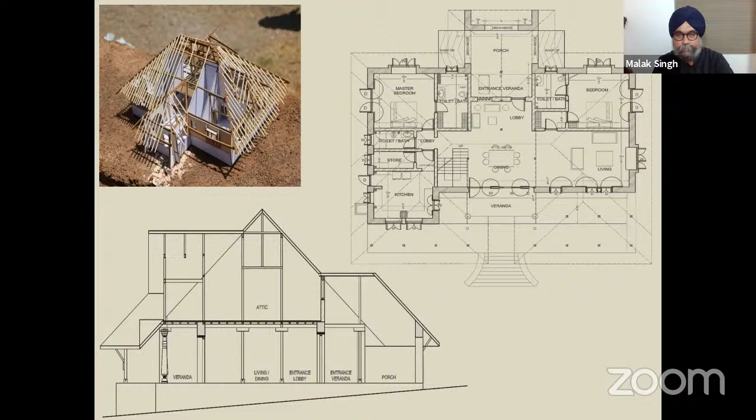That's the house from the other side. You saw the entrance before from the west. That's how it looks from the east. The site is a bit sloping. That's how it looks from the inside. You can see the timber first floor, attic above, terracotta tiles. This house remains extremely cool even during summers. That's a lime plaster on the walls.

I must mention that we really like to work with the clients very closely. Clients participate in the entire process and work with us in choosing small parts of the building, furniture, finishes. So we believe it's a partnership, because I think buildings are over designed these days. And I think the house finally needs to look like the person's house rather than the architect's design.

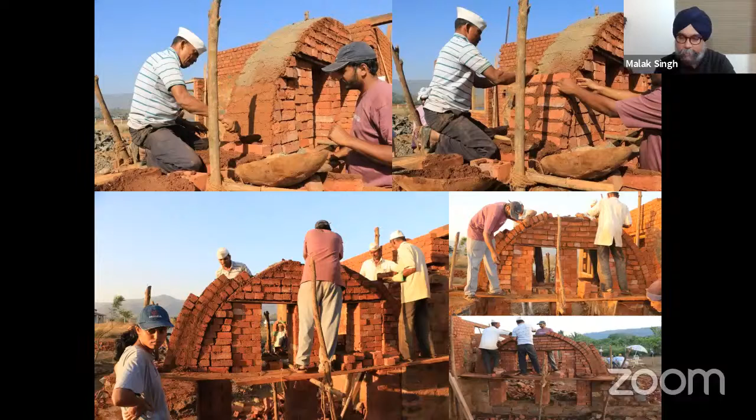That's the veranda, which is really the most interactive part of the house. That's what you can see from the veranda on the ground floor. That's the process of making. There you can see the arches being built. You can see the building behind in the background, where the walls are all in mud mortar. You can see the arches being done in mud. My architects are working along with the masons. And then this is how the arches look.

That's how the first floor looks, with the wooden floor and the clay tiles. Extremely comfortable in summer. And that's how the building opens up to the view on the east, on the first floor. After doing that building, the client decided, because it was a very successful venture and they were really doing well at business. So that was a 5,000 square feet house with almost just three bedrooms, because it was a homestay.

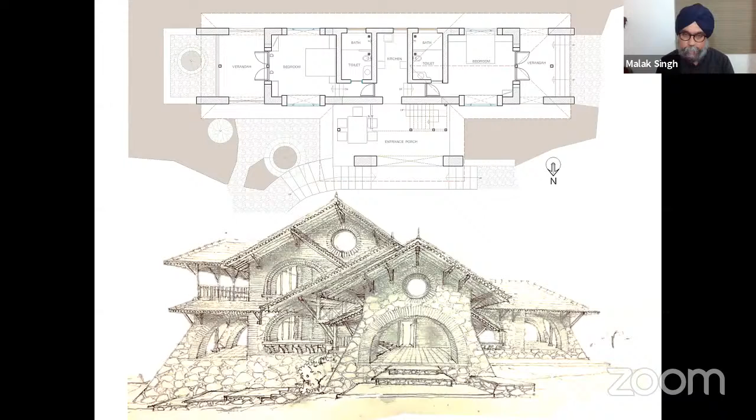Then the client commissioned another building right next to it. You saw that this house had a view to the river. So because she needed more rooms, she commissioned a house right in the same plot, but perpendicular to this building, so that we can avoid cutting the view of the first project. So you see a very linear plan, a series of rooms, and therefore we thought that if it's just a linear thing, we could use a language of arches because it's a unidirectional kind of building. So that's how the building turned out.

This was on the opening day. And you can see the old building to the right. This is perpendicular to that. It's actually the side open space which was there. And that's how both the buildings look together. You can see the big building behind, the one I showed you before. While there is a continuation in the materiality, the language of the construction is different. Materials are the same, and it's done by the local people.

So we are also learning techniques, passing on some innovations. But at the end of the day, the people have a feeling that, wow, this is beautiful. And the question they have in their mind is not how the hell did they make this, but the feeling is that, wow, we can also make it, because it's their own cousins and kin who have built this building.

So that is also a hidden agenda I have: sure enough, I'm building for this client, but I'm also speaking to the local population, and I'm showing them that this is some architecture to look up to, not just the kind of buildings that you look at from the cities, or the people who go back to their villages and build unnecessarily using concrete and steel. These are also buildings which can be built, and it was quite successful. A lot of people are wanting to get similar buildings done from us, right from the millionaire to the farmer.

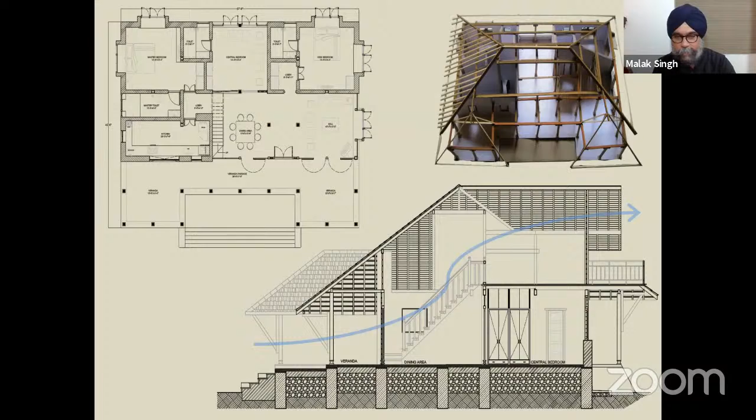This is another in the same series of similar projects, but this is a house. This is a kind of weekend home, not a homestay. I'll just run through this quickly because it's the similar typology. Buildings without cement and steel, except for, of course, the tiling, etc. Veranda is a common feature, local wood, local craftspersons.

Another feature you will see in the buildings I'm doing is, since we are in a warm and humid climate, a lot of the buildings don't have walls in the living, dining, and common areas. The walls are only in the bedrooms and kitchens sometimes, so basically there's a question of privacy, etc. But otherwise, a lot of these common and public spaces are all open. They don't have walls. They have just kind of fenestration and glass partitions.

There's a staircase which we detailed out. Interestingly, this staircase was detailed with the waste wood which we got from the roof. So each member of the staircase is actually a part of a roof. One is a common rafter, one is a batten, one is the planks we used in the ceiling as a boarding. This is a typical bedroom where it's just lime plastered and extremely cool. An attic.

Another house in the same series where it's a ground plus one structure. But here we used a couple of things. These are all, of course, needless to say, all in mud mortar. Some details which we used for construction. You can see on the top right, we've used a double tile. There's a bottom tile and another tile on top.

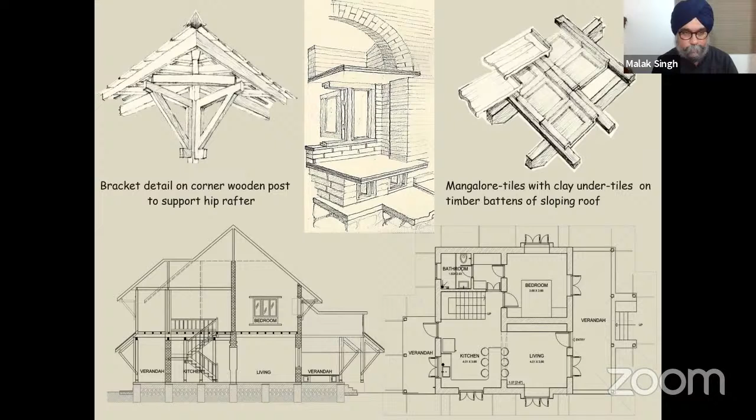That makes this house one of the coolest houses we have done till date, because of a double clay tile roof. That creates an air gap and makes the building cool, apart from the other factors of design planning. There's a double arch we have done, and you can see the double height. Those are the tiles we are talking about, and of course, there are these openings for letting the hot air get out and getting some light to get in.

Now, there is a kind of house which I have done where it's extremely linked to the ground and the resources are from. So you see these wooden columns and posts. This is a community house. These wooden columns and posts are basically those trees which you see in the backdrop. Just maybe a couple of months before this house was built, all these wooden members were those trees. This community has been protecting the forest for more than 2 decades.

So when I was to design a community house for this organization, we just had to learn from what the local typology was. We encouraged the organization to adapt local building techniques and planning systems. Of course, there were people from all over who had come to learn what we were doing, and they participated. So it was a collaborative process. The community is called Vanwadi, and they have visitors from all over the world. So basically, that was the model.

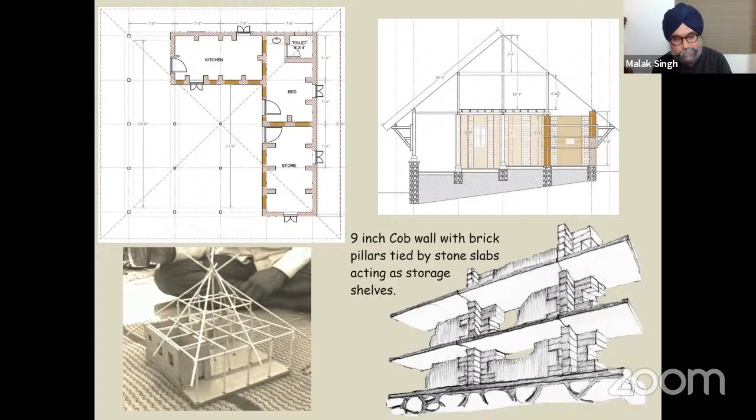So that's the roof. We learned a lot of indigenous techniques from them. They use an alcohol which they brew from the mahua flowers, which they use to paint this wood. That treats it. It's pretty good for many years.

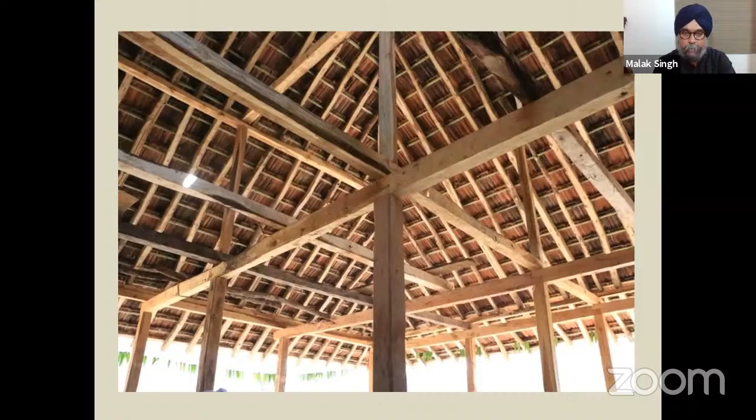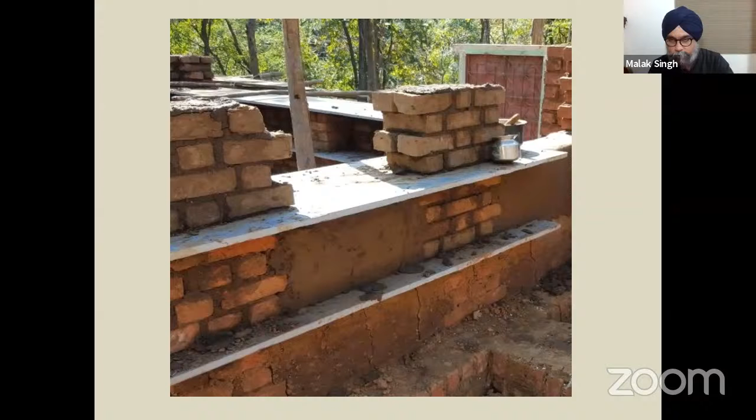This is how we did the walls. You see that there are these brick pillars, and then there is a mud wall in between. The stone shelves come in as stiffeners. We put them in while the construction is going on, but later on they end up as a store, helping as storing shelves. So they give stiffness to the wall, and this is how the wall was being built, the cob part in the center between the brick piers.

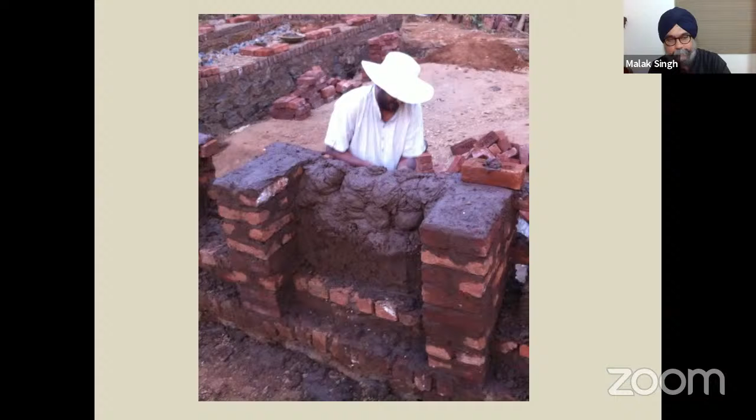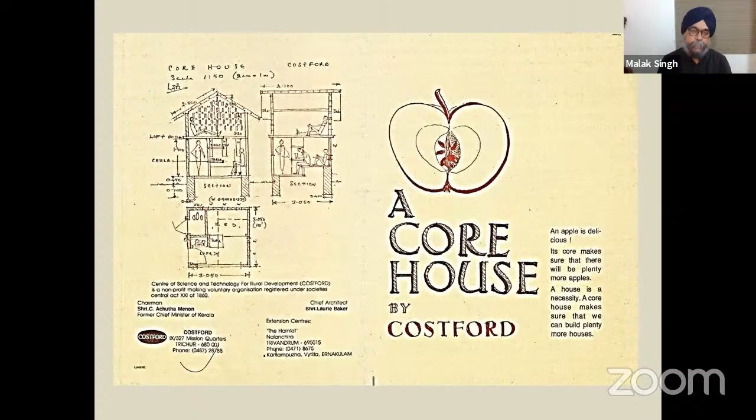Bakerji shared a concept of a core house. In furthering the understanding of a village house, this was very important because if you see these sketches, a central portion of the house is built as a core, just like an apple, which he has drawn up here. Around the apple, there are layers which grow. The rooms, the central core, is supposed to allow these spaces to grow around itself. So when you design the first block, it can allow surrounding blocks to grow. This is like thinking of the future, thinking of expansion, saving future costs. It's always been there in the village thinking.

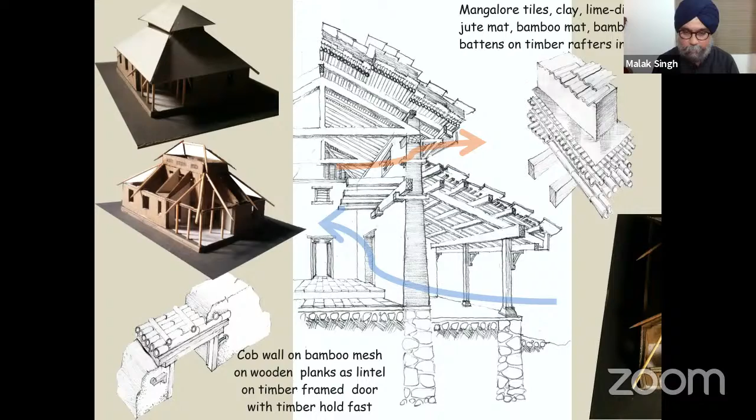This is how the house was done. It's a village house without any pretense, without trying to look like a showpiece, reflection of people's aspirations. This is how it was made.

It is interesting how an architect can actually be a catalyst to go and revive a local technique when the locals themselves are unable to do it. It's pretty humbling as an experience. This is the mud wall being built, 3 feet at the base and 16 feet tall. As it goes up, it becomes 1.5 feet at the top.

A bamboo boarding roof with country clay tiles on top of it, and extremely cool. You can just see the quality of light which comes in and how cool it is. I mean, if pictures could tell. Some details - you can see the mud wall, you see the details for the brackets.

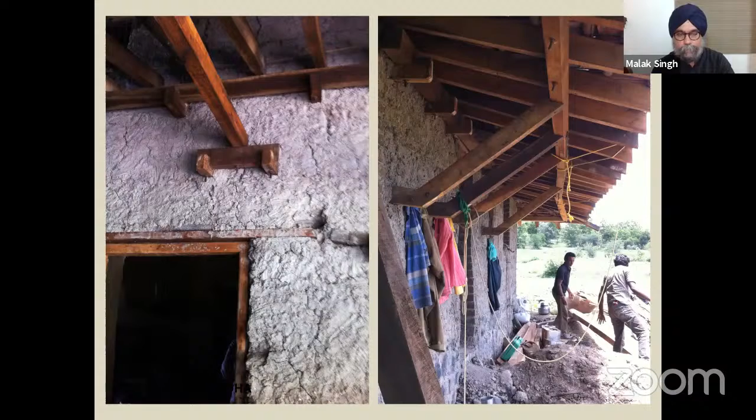Now, part of my understanding of this talk is about nature. Part of my understanding comes from a theory of cultural ecology, where Julian Steward really proposed that the cultural core is there - some aspects of culture are taken at a very superficial level, and there are some parts which are actually at the core of it. So when we talk about nature, I have come to understand that you cannot look at nature without understanding how man has looked at nature over the millennia. And culture is that kind of sieve or filter through which man has looked at nature.

And like it or not, our choices are mostly socio-political. What I mean is that I cannot design a house in a local area without going and making friends with the masons, without going and chatting with them over chai, without coming across as harmless to them. In fact, without showing incentive that they can learn a lot, earn a lot from my intervention. So there's a very socio-cultural aspect to my practice. Without that, I don't think I would have been able to conserve nature, because I have to get on the same plane as people in the way they look at nature, and then we can together do it through our buildings.

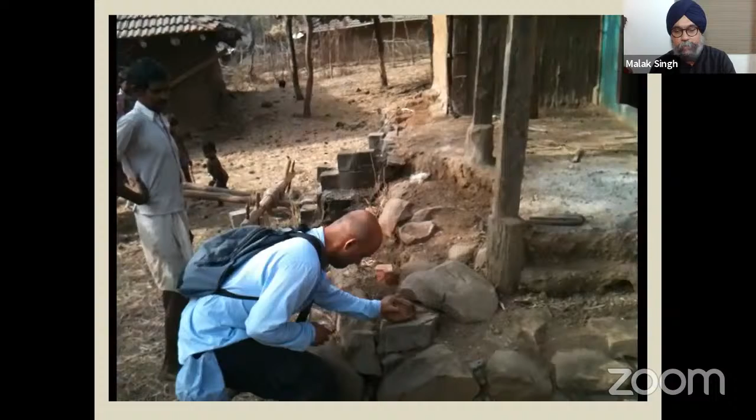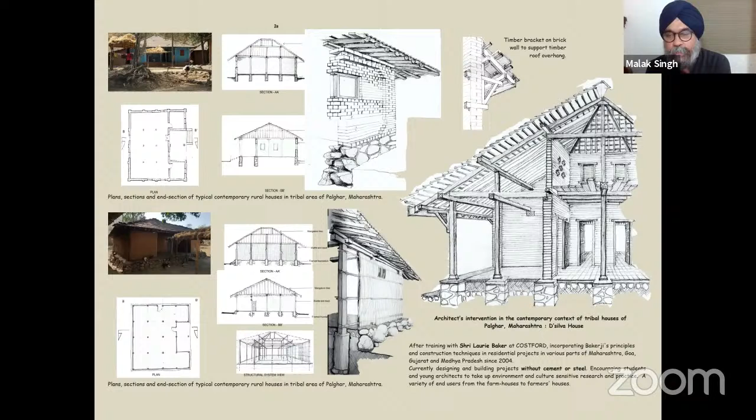This is the study we did for understanding the technology. This is a study we do for most of our projects where we don't know what are the types of constructions. To the right is our solution. It's a composite building with the same plan, same construction grid, but we tweaked it for our advantage. Here you can see the plan and the model of that building.

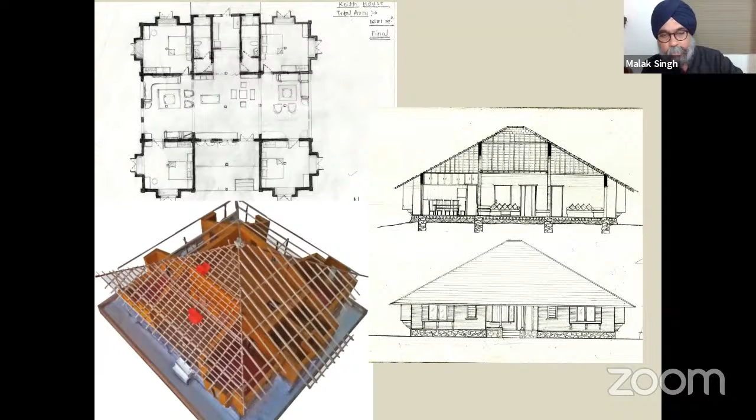We have been doing a lot of hand drawings, as far as we can manage, where we don't use computer drawings because they're no use for the contractors anyway. We like to keep working a lot with our hands.

Central core building - remember the core building I told you about? The central space is a core, and surrounding all four sides are verandas, as you can see here. See the cross section - you're seeing it from a veranda.

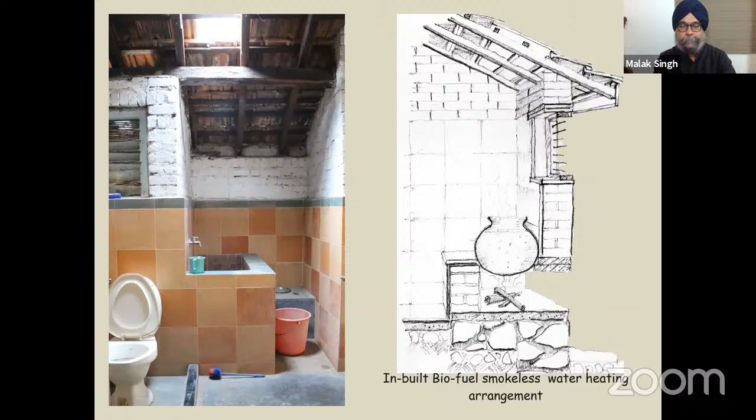So the idea is that one has always been thinking that trying to make a house is not just making a house for the owner, but it is in a way trying to give back to the community around, to try and see if some improvement is possible, affecting a much larger landscape than just the building and the owner you're building for.

So they said that, well, these guys, all they need is a mosquito net. Why make windows? And they were absolutely right. So people love these rooms without windows. There's a chick which we made out of the local Karvi reeds, and your bed is covered with a mosquito net, so it's extremely romantic.